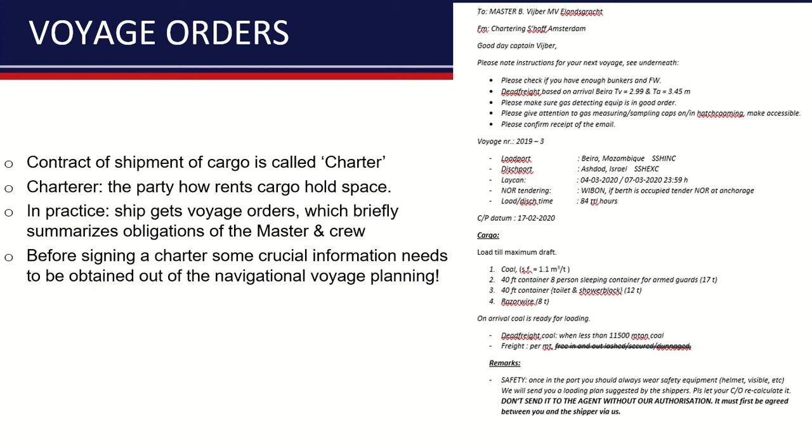Before we start a new voyage, we usually need to clean the hold of the vessel, and the thoroughness of cleaning depends on the next cargo and the demands of the charterer concerning that cargo.

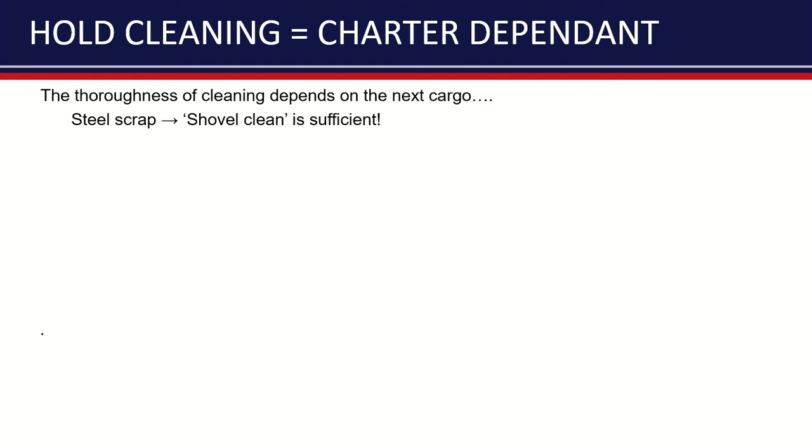For example, if we load steel scrap, shovel clean, in Dutch bezemschoon, will be sufficient. Usually we distinguish a couple of grades of cleanliness, about 4 or 5 grades, and the cleanest ones are hospital clean and grain clean, which are regularly used for loading bulk meant for human consumption.

One which is not mentioned is load on top. Some people would say it's not really a grade of cleanliness, but it's something we actually use when we prepare a stowage plan.

Actually, to some extent, there's another grade, which I usually call normal clean plus freshwater rinsing, used in case we load steel cargo. We won't make the cargo hold grain clean.

Nevertheless, if we do normal clean and only rinse the cargo hold with outboard water, there might be some residue of salt in that water, and the salt will progress the amount of corrosion on steel cargo. So there's a second round of washing in case we load steel cargo, and that's with fresh water.

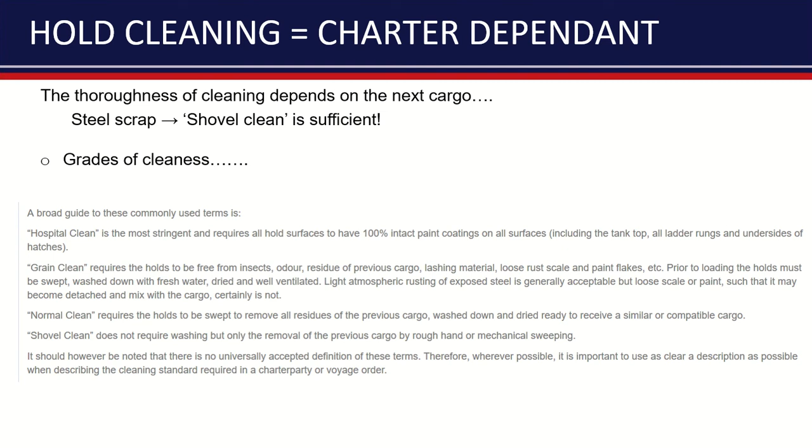Because of the importance of hold cleaning, the senior rank officers will monitor this hold cleaning process meticulously, because there's a lot of money involved in case the cargo hold isn't clean enough according to an independent surveyor.

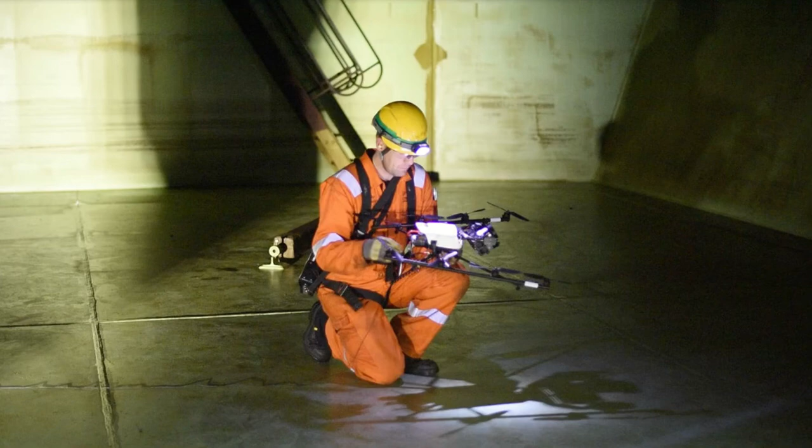Usually shortly after tendering the notice of readiness, an independent surveyor will check and inspect the hold for cleanliness, to see if it's up to a certain grade. For some high points, he might actually use a drone and video camera to do his inspection. That's something of the recent era.

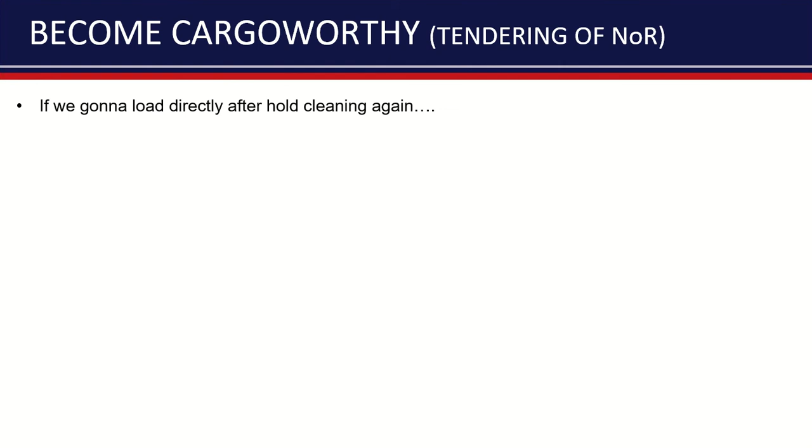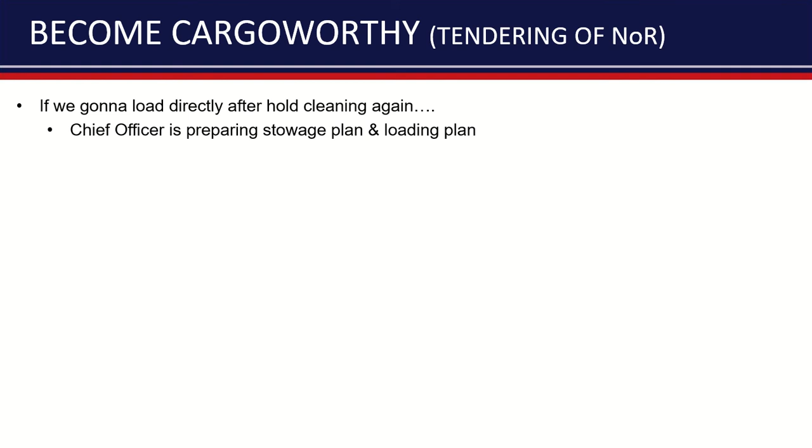If we're going to load directly after the hold cleaning, the chief officer will be busy preparing the stowage plan and loading plan. A loading plan implies the steps of loading and at the same time the steps of deballasting the ship, so the ship will stay within limits concerning shear force and bending moment.

When the hold cleaning is finished, the captain usually tenders the notice of readiness with a signature, the date, and the time, with the time zone also mentioned, and the ship stamp. The default setting for tendering a notice of readiness is when the ship is ready in all aspects.

There are some other moments to sign the notice of readiness. Sometimes it's done at arrival at the pilot station, but the default setting is ready in all aspects, meaning when you're alongside and the hold is clean.

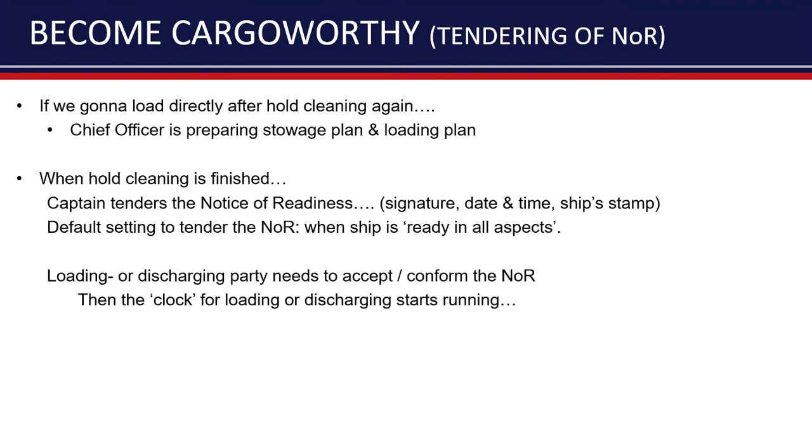The loading or discharging party needs to accept and confirm the notice of readiness. That's very important, as it has to do with the starting of the laytime, in Dutch the ligtijd. So when it's accepted with a certain time mentioned in the acceptance, the clock for loading or discharging starts running.

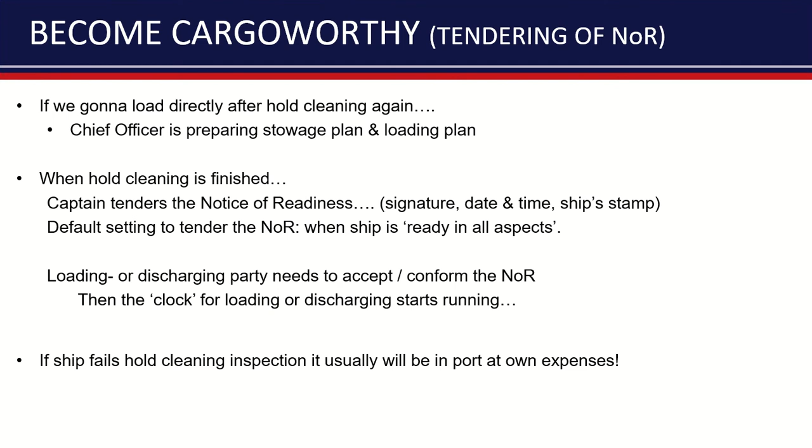In case something goes wrong during the survey for the hold cleaning, it usually means the ship will be in port at its own expense or at the expense of the owner of the vessel. So that's something to be aware of, that hold cleanliness is very important in that aspect too.

So we continue with some theory about making calculations concerning the stowage plan, loading plan, and leaving seaworthy to sea. There's a third dimension besides the two other ones, the vertical one and the longitudinal one. There's the transverse one, and that one is important concerning the list of the vessel.

We see a ship, the center line is mentioned, and point G, the transverse center of gravity, is in the center line. In that case, the ship doesn't have any list. Point G is exactly in the center line, and the effective moment transversely with reference to the center line is 0. So clockwise and counterclockwise, the summation of those two is 0.

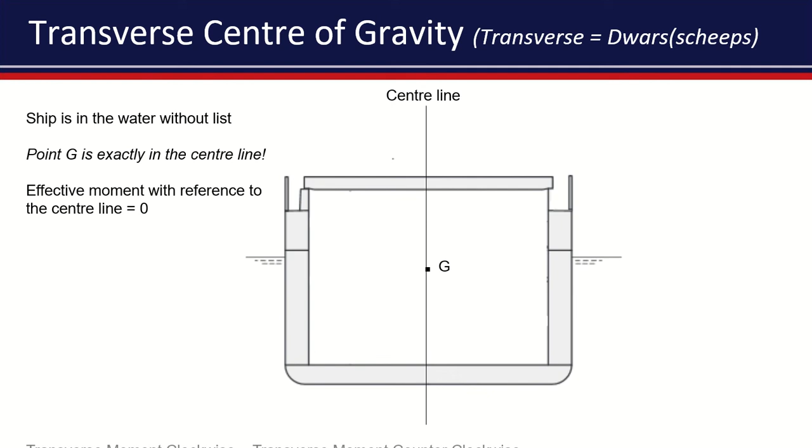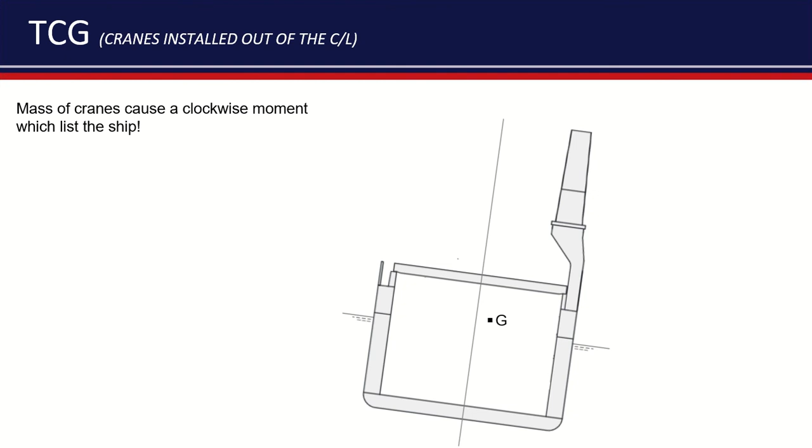We use clockwise and counterclockwise in case we speak about transverse moments. With the Elandsgracht and the Morgenstond, the mass of the cranes causes a clockwise moment which lists the ship, in this case to starboard. We need to compensate this list to the other side, and we do it with water ballast.

In practice, we compensate the clockwise moment with a counterclockwise moment until the resulting moment is 0 again, and in that case, point G, the transverse center of gravity, is back in the center line again. We do it with water ballast, usually in the side tank.

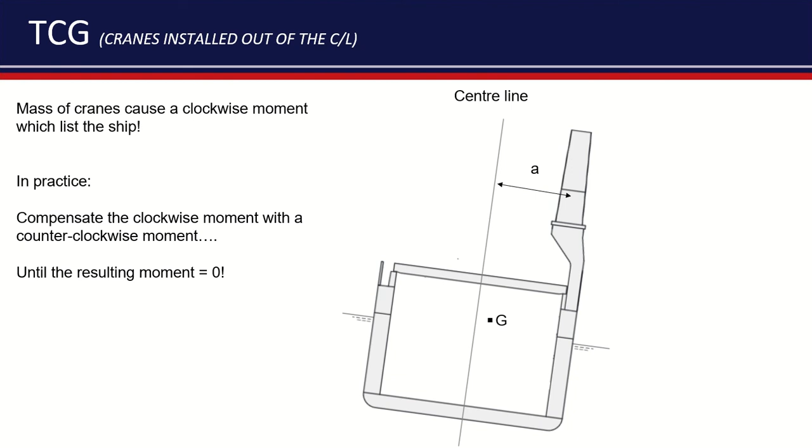Here's the water, and in that way we can pull back point G towards the center line, so the list will be 0 again. This is how we like to go to sea.

And if we need to do something quickly on board the ship, we use the anti-heeling tanks. These are two communicating tanks with a big pump in the middle, and with this system, you can bring back the list very quickly back to 0.

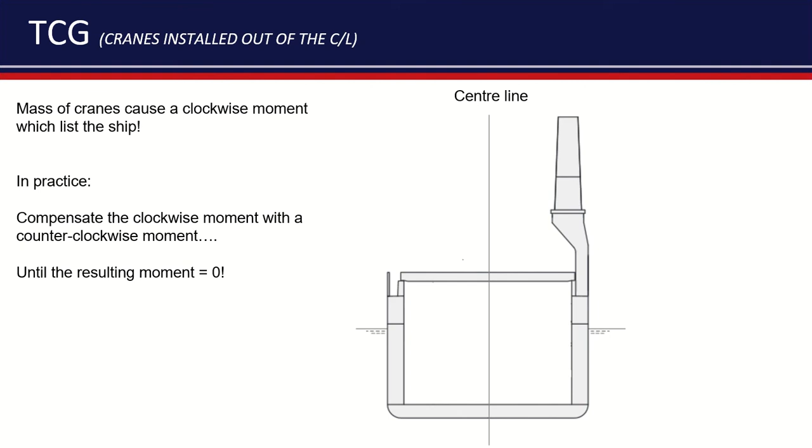So some rules of thumb when we design a stowage plan. No flammable cargo next to the engine room bulkhead. That's due to the heat radiation which might be a source of ignition to that flammable cargo.

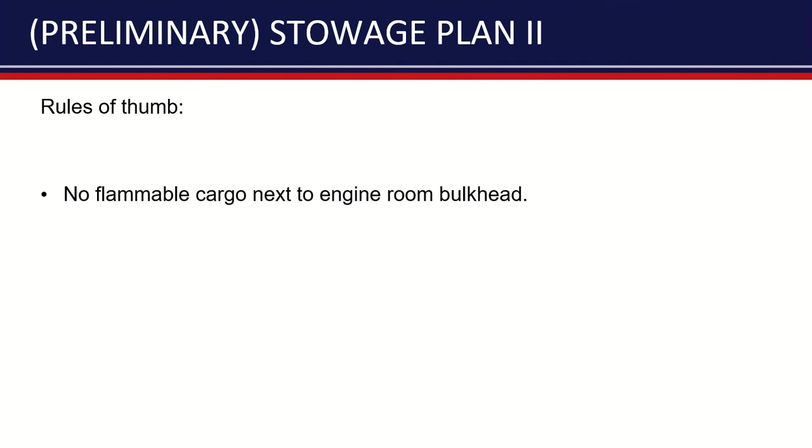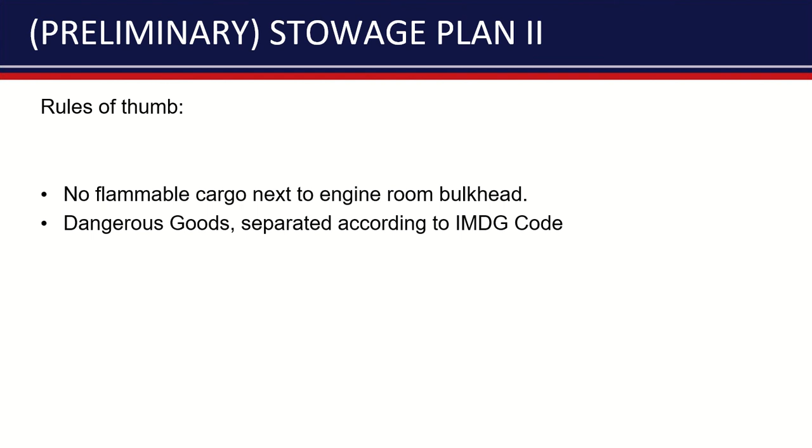Dangerous goods need to be separated according to the IMDG code, and we're going to work with it soon. It's a code where all dangerous goods are mentioned with their standalone risk, but also their risk if you combine multiple dangerous goods close to each other, and the amount of segregation we can find in this code.

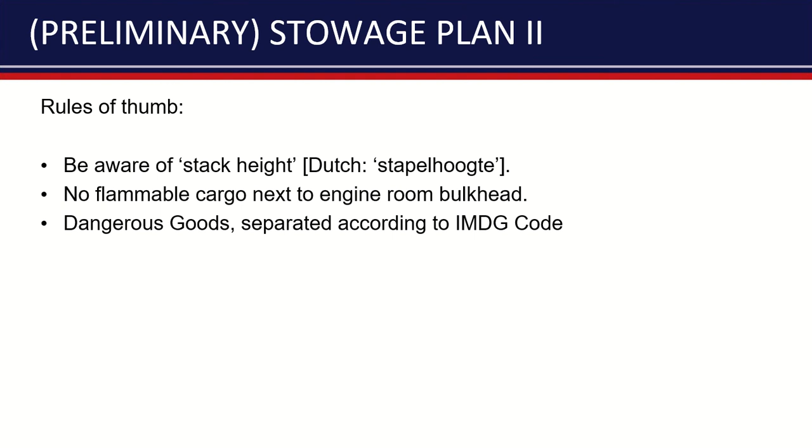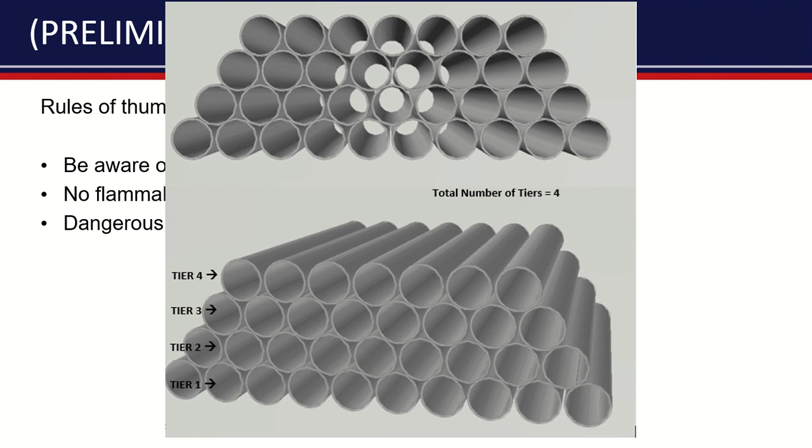Be aware of stack height. In Dutch, we say stapelhoogte. It's actually the amount of tiers you put on top of each other. So the lowest tier we usually call tier number 1. With containers we have another numbering, but the lowest tier we usually call 1. We need to make sure that tier number 1 is able to withstand the pressure and force of 3 tiers on top of itself. Something to be aware of.

So here we see some lashing. We call this pyramid stowage. Here you see some blocking dunnage vertically, and here, protecting the corner of the lashing, is something soft, and the lashing is done with bulldog grips.

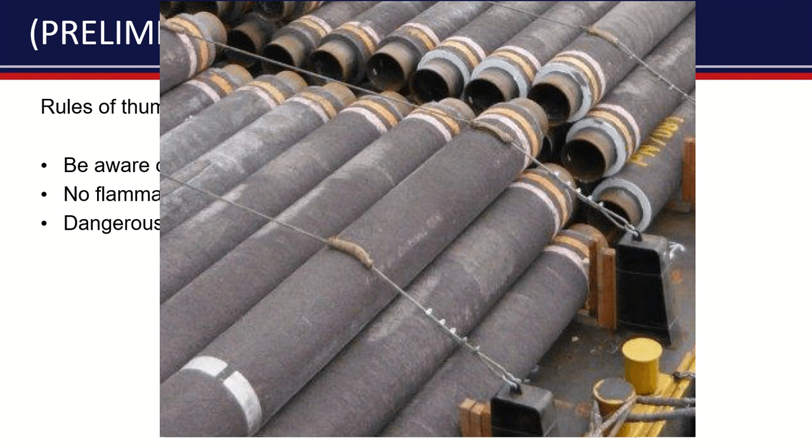So some more rules of thumb. Make blocks of cargo, usually squared, because we work with box-shaped cargo holds. It's easier to work as such. Don't waste too much ullage, but keep enough in case you need to ventilate. Sometimes you need to be able to ventilate through cargo to take away moisture or a bad atmosphere. So it needs to be closed enough usually, but sometimes you need some gaps to ventilate sufficiently.

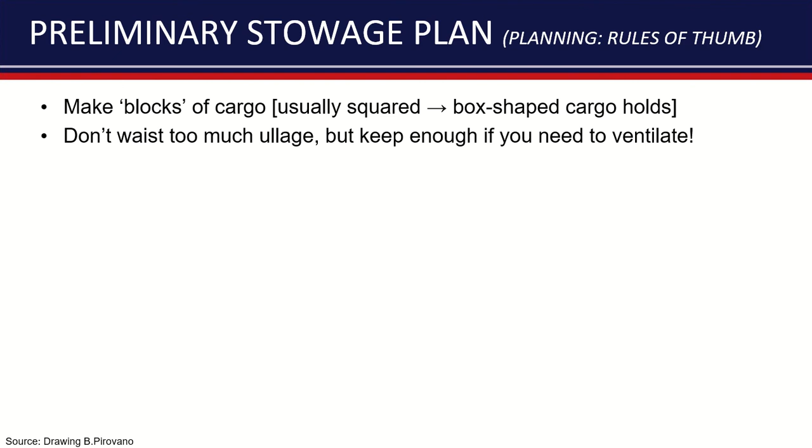Here are the blocks. There's a distinction between on-deck cargo and cargo in the hold, and it has to do with insurance, and it's also in relation to the Hague-Visby rules, where we're going to speak later.

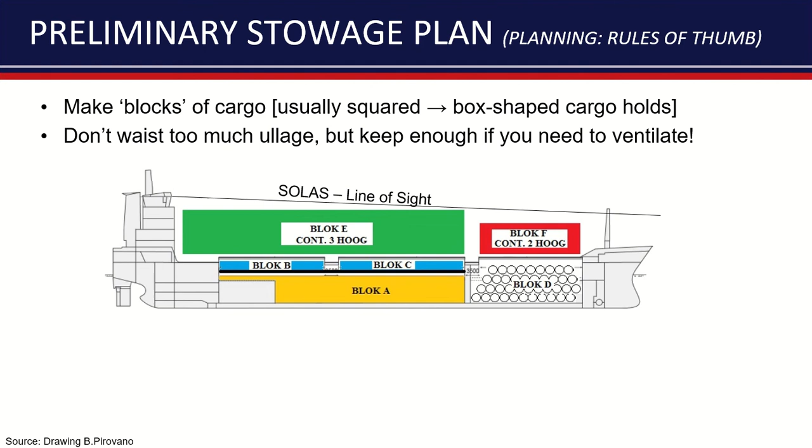So with multiple load or discharge ports, usually in cargo it's first in, last out. A complicating factor is multiple load and discharge ports, and in that case we need to think about the discharge sequence later on, and that's something to be aware of when you design the stowage plan.

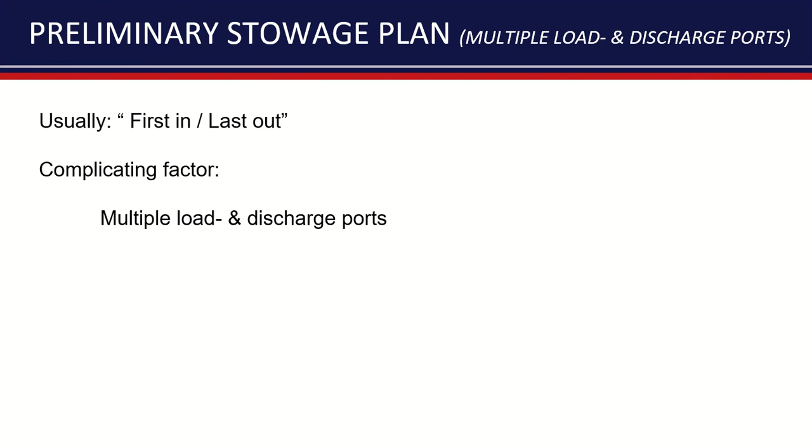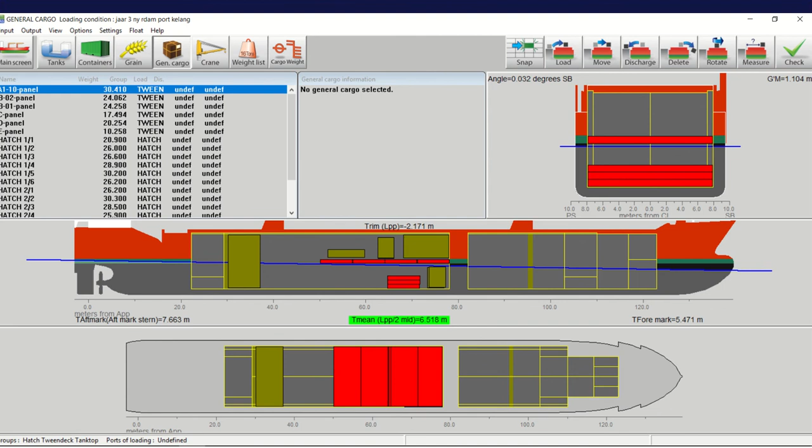Try to limit shifting of cargo and/or tween decks. Usually you also need to shift the tween decks. The tween decks are actually over here in red. So if we first go to Amsterdam and secondly to Rotterdam, it's not very convenient if we put cargo for Amsterdam over here. So the first discharge port cargo should be here. That's most convenient, and that will save you time and effort and shifting of tween decks and maybe even cargo. So be aware of the discharge sequence and the port rotation coming with it.

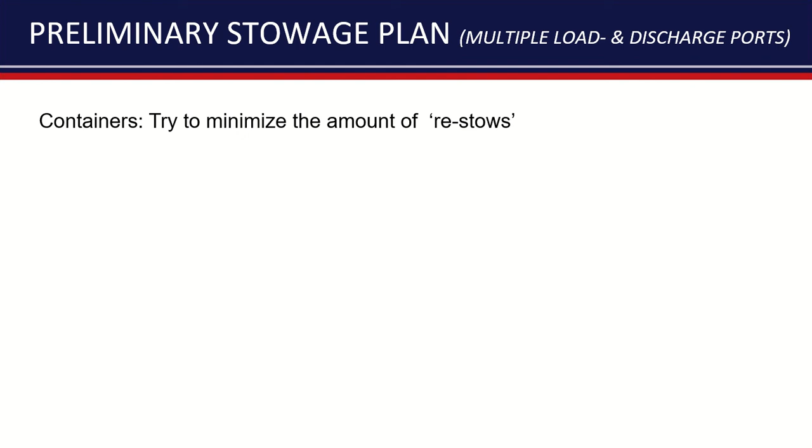With containers, try to minimize the amount of restows. So in case you need to take a container up, put it somewhere else, and bring it back later on, we call that a restow. Try to minimize the amount of that. Not always possible.

Installed tweendecks can be used as a sort of paraplu against drizzle or rain. Nevertheless, the gaps between the tweendecks are not fully watertight, be aware.

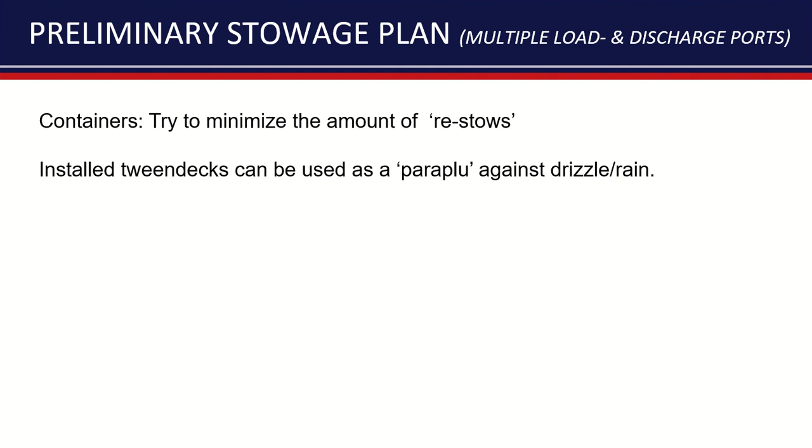A loading plan is a final stowage plan which includes a detailed plan of the loading sequences and amounts combined with the deballasting sequences and amounts. And at all steps, with all the weight changes, the officer will check bending moment and shear force, sometimes even torsion, to see if we stay within the limits.

And we have harbor limits and sea condition limits. Usually in the harbor we work with the harbor conditions. Nevertheless, if you go to sea, it needs to comply with the sea conditions.

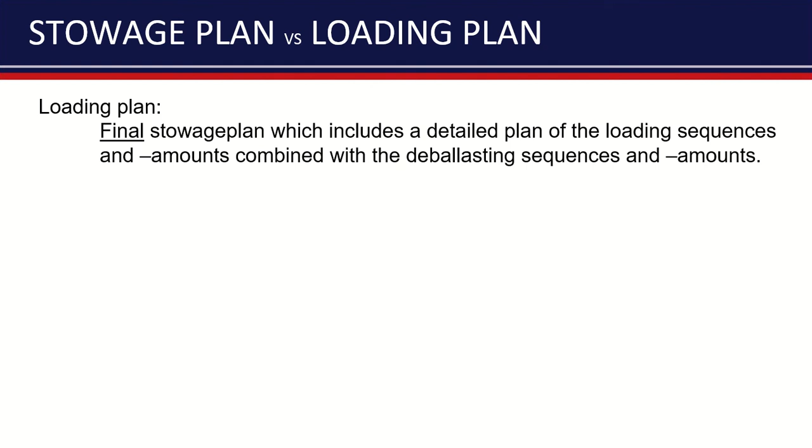And that has to do with the differences between dynamic loads of waves and swell, etc. The chief officer needs to check all these steps to make sure there's no exceeding of the maximum shear force, bending moment, and sometimes torsion.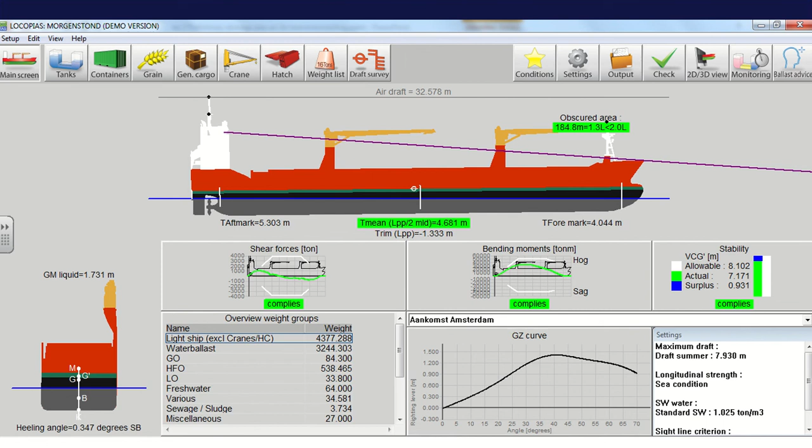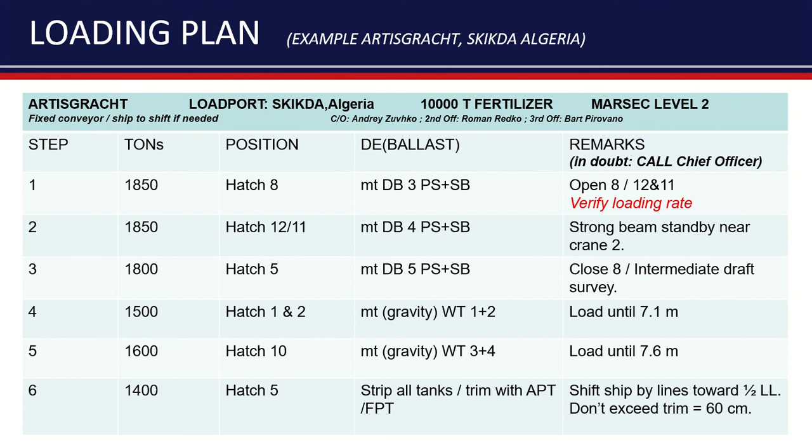So here an example of a loading plan. At remarks, we can also see some other items which need to be done by the duty officer, for example a draft survey or keep a strong beam standby. And all the steps, all the sequences are written down, and also in the fourth column, what to deballast at the same moment. That's it. Thanks for watching.